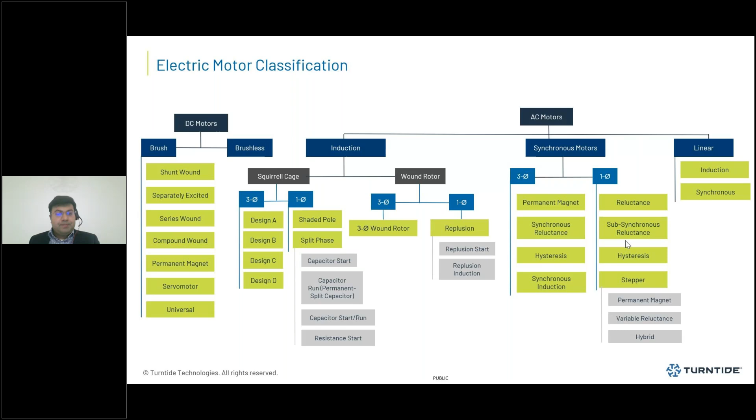So we're going to start off with the poll. Laurie, would you like to kick off the poll? Yes, let me launch this poll for you. So, you know what? I can't launch it because I can't find it in my list. So why don't you ask the question and we'll launch our next poll? Sure.

So just as a quick introduction to the axial flux motors, if you can guess when the axial flux motors were created, whether it was the 1700s, 1800s, or the 1900s. Keep your answer, and then we'll move on. Shall I move on, Laurie? Yes, please. Sorry about that.

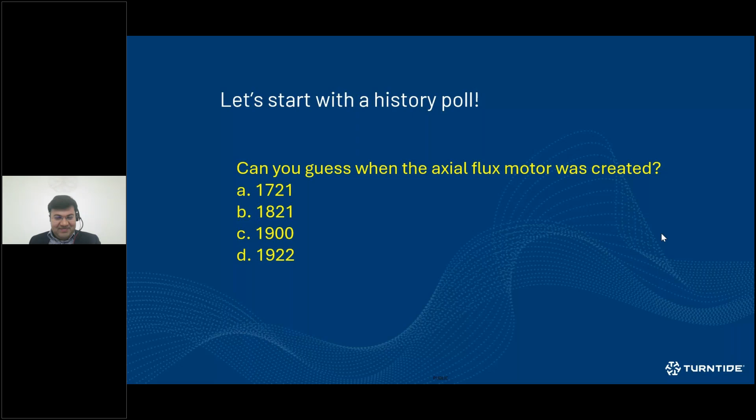No worries. So the first axial flux motor was, in fact, the first motor that Michael Faraday invented in 1821. It was of an axial flux topology. The radial flux motor, as the simple motor as that was called back then, was developed by Thomas Davenport in 1834. So here we've got a later model of the Faraday axial flux motor, which looks a lot more like the pancake motor arrangement that we're used to seeing today.

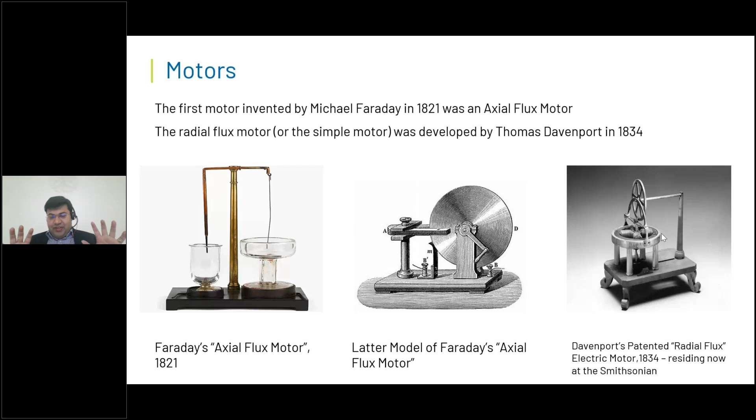So let's get into what differentiates an axial flux motor from a radial flux motor. It's based on the orientation of the magnetic flux. So if the magnetic flux is in direction radial to the axis of rotation, that's when you have a radial flux motor. Or if it's parallel to the axis of rotation, then you have the axial flux motor. And that is driven by the way and direction and topology of how the magnets are arranged. So if you can see on the diagram here, the axial flux motors have magnets arranged in such a way that the flux is parallel to the axis of rotation.

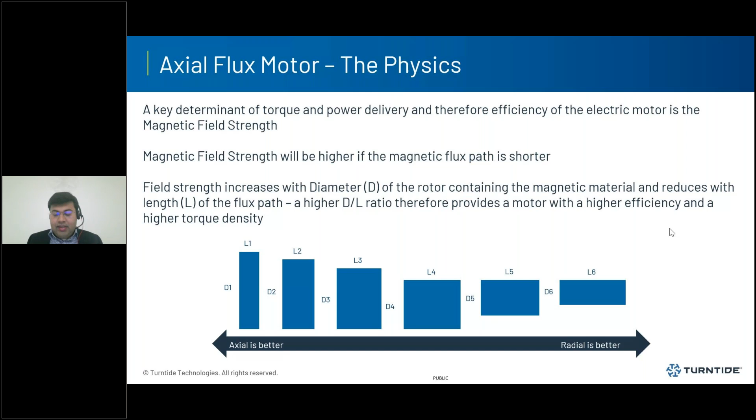So the ratio that we tend to work with in terms of determining that is the D/L ratio, diameter to length. With axial flux motors, you tend to have larger diameters and shorter axial lengths, so the magnetic flux has to travel a lot shorter path. The intensity of the flux is a lot higher in those instances. And so if you want much higher torque delivery, much higher power delivery, and therefore a lot greater efficiency as well, you tend to find that the D/L ratio is favoring the axial flux motors much more so than the radial flux motors.

Some equations: this is probably the only technical or semi-technical slide that you'll have on the presentation. With the radial flux motors, the torque tends to vary as the square of your diameter, whereas with the axial flux motor, the torque tends to vary as the cube of the diameter. Now, as you increase the size, the torque density stays the same with radial flux machines, but because of the cubic nature of diameter variance in terms of axial flux motor, as you're increasing the size, counterintuitively, your torque density also tends to increase with axial flux machines.

So people tend to think that bigger machines will be less torque dense. That's not quite the case with axial flux machines. Bigger machines tend to be even more torque dense than the smaller machines as far as axial flux topology goes. With radial flux machine, you tend to have fairly heavy weight and high inertia in terms of rotor, whereas with axial flux machine, on a torque to torque comparison basis, you'll have much lower inertia rotor that can deliver the same or higher amount of torque.

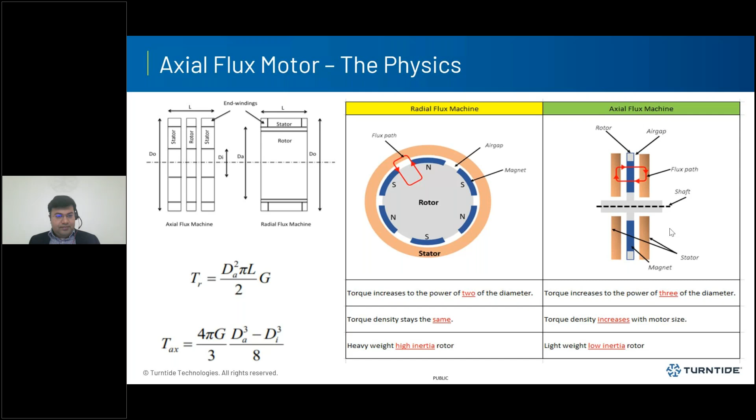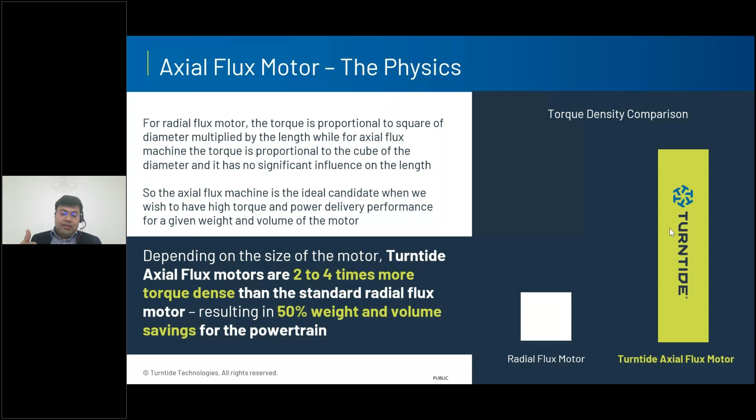So because of the cubic nature of torque variance with respect to axial flux motors, you tend to get 2 to 4 times more torque density compared to the standard radial flux motor. So if you convert that in terms of weight and volume savings, you'll have about 50% weight and volume savings for your powertrain. Now that is huge. If you're a vehicle designer, if you're a powertrain designer, almost halving your weight and space can lead to a lot of benefits, including more components in your powertrain, as well as making the whole system more efficient.

So, poll question, Laurie. Yes, we have another. We would like to know if you or your teams have implemented axial flux motors in any current vehicles or equipment, or actually are a user of one such equipment. We've launched the poll, and I feel like the answers may be similar to the last poll. Pretty much, yes. We'll give you about 20 or 30 seconds to answer, and then we will go ahead and end it and share the results.

And yes, 5% yes, 95% no, which is kind of what you probably thought. Very similar to the previous question. Yes, excellent. Okay, good to know.

Another poll question. For the 5% that did say yes, or the 95% that said no, if you haven't implemented an axial flux motor before, what was the main reason that led you to not implementing axial flux motors? Was it the availability of the product itself, or the price point, or the suitability to the application, or you simply were not aware of the existence of axial flux motors and looked into it? Yeah, we have launched this poll, and you can actually select more than one answer. So feel free to do that, and we'll give everybody about 15 more seconds to answer.

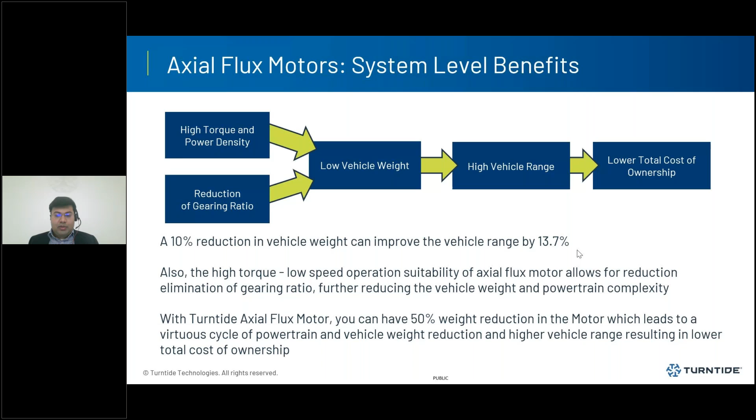Another key benefit that I want to talk about is the absence of cogging torque. Now, cogging torque is a phenomenon that occurs in permanent magnet motors where, if you ever moved the rotor by hand, you can feel the rotor moving in discrete steps rather than smoothly rotating fairly uniformly. And this is because the permanent magnets in the rotor and the stator teeth are interacting, and that is creating a pulsating torque. Now, if you want a fairly smooth operation, which granted most vehicle operations would require a smooth, non-jerky, and precise motion, then the cogging torque is a fairly big evil.

Now, in order to mitigate the cogging torque, you can use various techniques. You can skew your rotors in such a way that the cogging torque produced is less. You can also adjust your stator tooth shape to make sure that the cogging torque is reduced or minimized, or you can implement fairly sophisticated sensorless control algorithm techniques where at those instances the current is varied so that the torque is lowered when it cogs.

So one of the areas where we researched and improved our products is the NVH performance of the motors. If you have segmented teeth in your design of your stators, you tend to get a lot higher cogging torque, and that leads to poor NVH performance. So what we've done is we've designed it in such a way that there's no segmented armatures, there's no segmented teeth in the stators, and so there's little to no cogging torque, almost immeasurably low, and therefore a lot higher and better NVH performance.

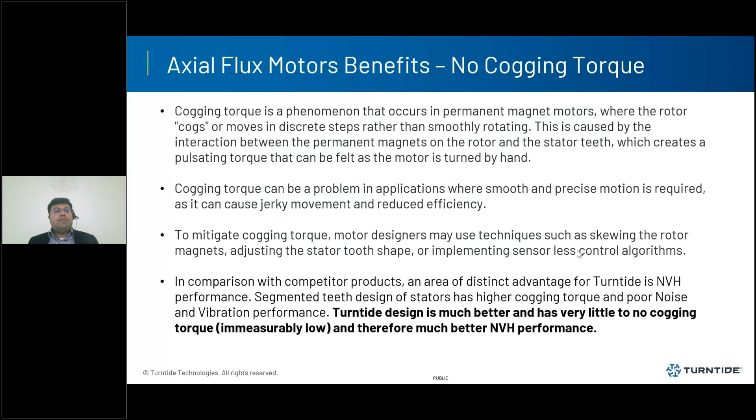Let's get into the types of axial flux machines. People thought that axial flux machines are only of a single type, but we can have multiple sub-varieties of that as well. And that can be done through the structure, i.e. the topology of the motor itself, what sort of cores you're using, what kind of slotting you're using, the type of winding distribution as well, and what sort of permanent magnets are being used.

So the type of axial flux motors that we've tended to focus on are the dual stator single rotor type or the Kaman type, using an iron core. And the other type of motor that's fairly popular is your single stator double rotor type or the Torus type.

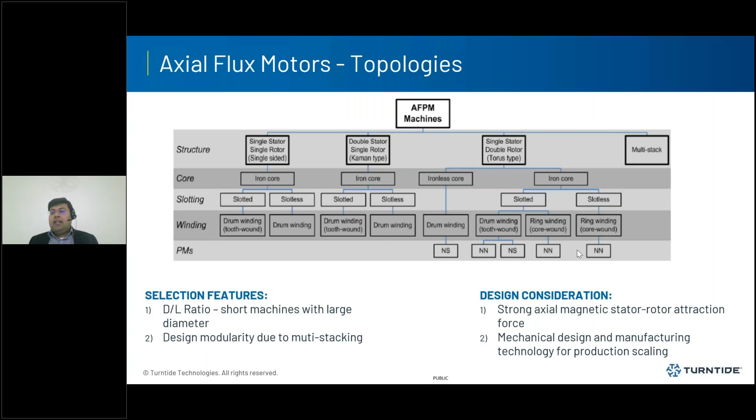Now, why did we go for the double stator single rotor feature? We wanted to maximize the D/L ratio and minimize the machine length as much as possible, and also provide design modularity where we can do multiple stacking. And the designs that we had available had the DSSR topology, the double stator single rotor topology, that lended itself really well to the multiple stacking options as well.

So just to diagrammatically illustrate that, the figure on the left here with the two stators and the single rotor is the Kaman type that we've gone for. It's without any steel discs. It's leading to a lot shorter machine length. And in terms of the cooling, you can have very effective winding cooling through indirect cooling jackets, as shown in the figure here.

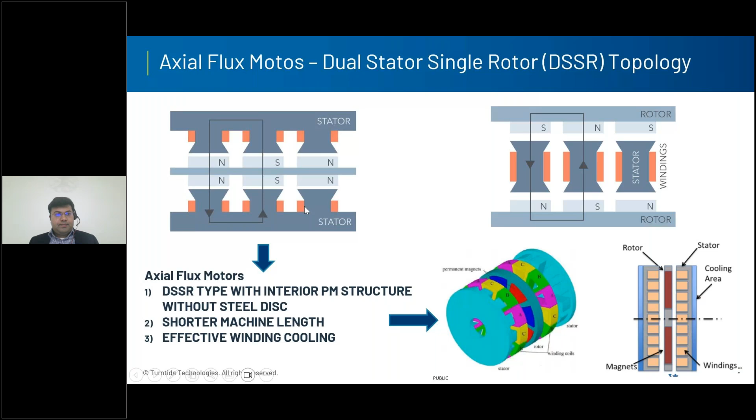In motor design, we've found the use of simulation to be fairly useful. We've simulated on all fronts, and that includes finite element analysis for structural integrity for vibration performance. We've done computational fluid dynamics as well to make sure that the coolant flow is optimized for the design and performance of the motor. And perhaps the most important simulation tends to be the electromagnetic simulation as well. So we've had in-house expertise where we used tools like Maxwell and others to make sure that the electromagnetic design and performance is optimized to its highest level.

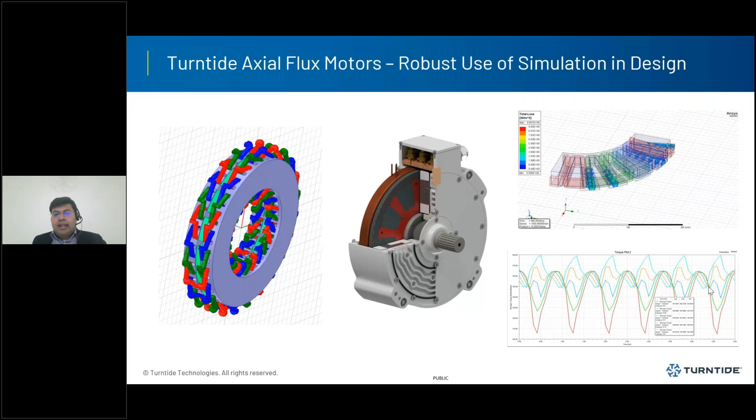So just an overall view on the DSSR topology and construction. At the top, we have the high voltage connector housing. This is typically rated to be up to a kilovolt. So high voltage applications up to about 860 volt can be covered while accounting for the ripple and the overshoots as well. We are constantly adapting and improving the connector housing designs for various orientations and for various types of phase cabling or busbar arrangements that are required for integration into end applications.

The heart of the motor, that's the composite rotor with embedded permanent magnets held into the spider cage structure. So if you can see the red spider cage structure, that's got the black permanent magnets embedded into them. And then they're banded together with a carbon fiber tape to make sure that it can hit the right velocities as required by the application while still holding the magnets in place.

We got the dual stator arrangement on either side of the rotor and cooling jackets. So this is a fairly conventional cooling circuit with a water ethylene glycol cooling mixture. The shape and the arrangement of the cooling fins, the cooling channels, is something that we are constantly researching and optimizing to give us the highest cooling efficiency with the lowest pressure drop as much as possible.

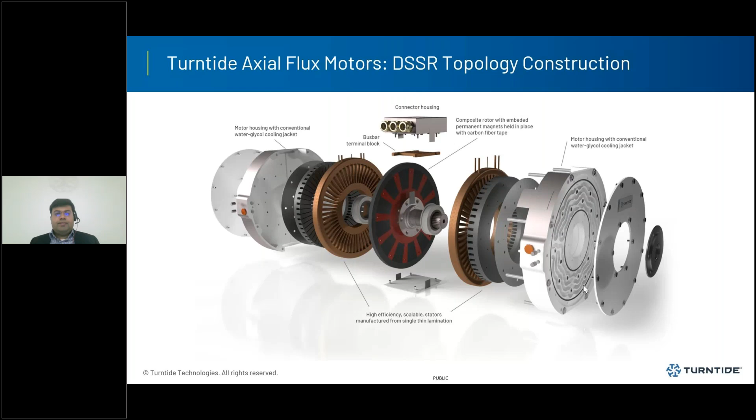So if I'm to summarize what the value proposition of the axial flux motors is, the first and the most clear benefit is the high torque and power delivery in a fairly thin design. So if you want a high performance application or your application has space constraints, or you can use the space for some other differentiating feature for your vehicle, then axial flux motor tends to be your motor of choice. As I mentioned with the topology before, this is a design that can be stacked. So you can have multiple stacks of these motors to give you a wide range of torque and power, and we'll cover the numbers in a few slides' time.

Efficiency as well, owing to the thermal design, the electromagnetic design, and the mechanical design improvements that we have done, we are able to hit the highest efficiency classes. We are easily at the IE4 efficiency class mark, and we are trying to hit IE5 and beyond with the new research that we're doing as well.

Cooling tends to be often ignored, but the fact that these motors are cooled using commonly used water ethylene glycol mixture makes it very popular and makes it easily integratable with other cooling circuits as well that can be used for inverters or power electronics.

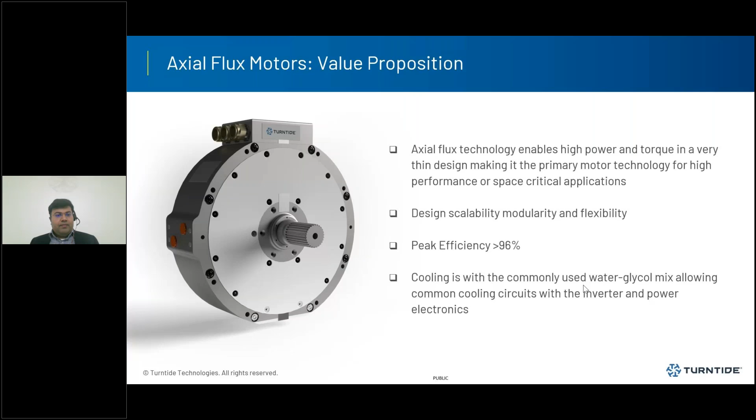So if you were to use axial flux motors for your future projects, given that there's a large audience that hasn't had the chance to use it, what would your top reason for doing that be? Would it be the power density and the torque density that this offers, the efficiency performance, if you'd like to stay ahead of the competition in terms of differentiating factor, if you're fairly space constrained, or some other reason?

So, Laurie, can we launch the poll? We have launched it, and we will give you guys and gals a few seconds to answer. Right now, it looks like high torque and space constraint is winning out. No one wants to stay ahead of the competition right now. No. No one. But we did say the main reason. That may be a sub reason. So we'll give you about 10 more seconds for those who have not answered, and then we will share the results with you.

All right, we are going to end and share. So maximum power density was 32%. Sorry, 23%. I read that backwards. The number one was high torque requirement in a space constrained environment, 62%. Maximum performance was 15%, and then staying ahead of the competition and other were 0%. So the three main ones were the three main ones.

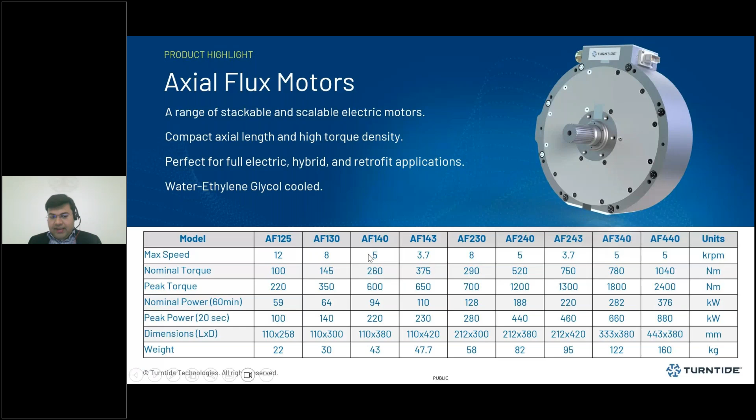That will bring it almost at parity or a slight premium with radial flux motors, and that's what we tend to do with the projects that we are working on right now. We're also considering using semi-automated or fully automated machine winding so that it can allow you to ramp up from tens of thousands to hundreds of thousands of motors in terms of annual production as well.

Most of these motors tend to be limited by their thermal performance. So optimizing the thermal part, the cooling channel, is a key differentiator and can give you lots of benefit by allowing you to push the motors to work at even higher temperatures and lower flow rates. So a key research area for our thermofluids guys has been to optimize the design of the cooling channel by reducing the metallic length of the cooling channels as well, and by reducing the pressure drop that's experienced by the fluid that's flowing through the cooling channels.

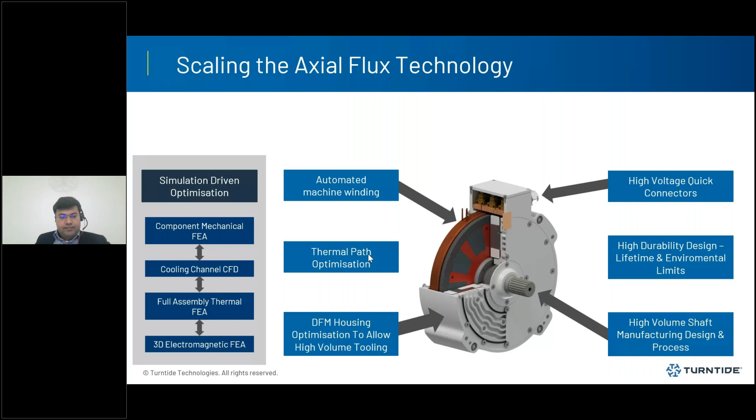Some of the applications where we've implemented these optimizations and performance benefits: as I said earlier, for premium automotive, it's used mainly for traction purposes for high performance e-motorbikes and automotive cars as well. There's a wide variety of applications in the commercial trucks and bus space, traction being the most common one, but we've had a lot of inquiries for electric power takeoff as well. For larger trucks and buses, they can also be used for ancillary applications. So if you've got a huge, big 60-ton truck, then you'll need a fairly big cooling fan for cooling the battery electric vehicle circuit or the hybrid circuit as well.

And the smaller diameter class of motors that we have, the 125 and the 130, are fairly popular for use for those ancillary applications as well. If you're also in the hydrogen game, I don't know how many hydrogen people have joined today, but we've got a solution for the hydrogen guys as well, because the smaller diameter, higher speed motors are also suitable for use as fuel cell superchargers.

On the off-highway machinery, similar domain with a lot of variety of applications. You've got construction and mining equipment. You've got excavators, wheel loaders, and that's where you can use for traction, both track and others, and ancillary functions for slew and swing. Another interesting application for us was street sweepers. Now, they have so many implements and are so space constrained that the axial flux motor becomes very applicable for street sweepers as well. So we've used these for traction as well as for sweeping implements on the street sweepers.

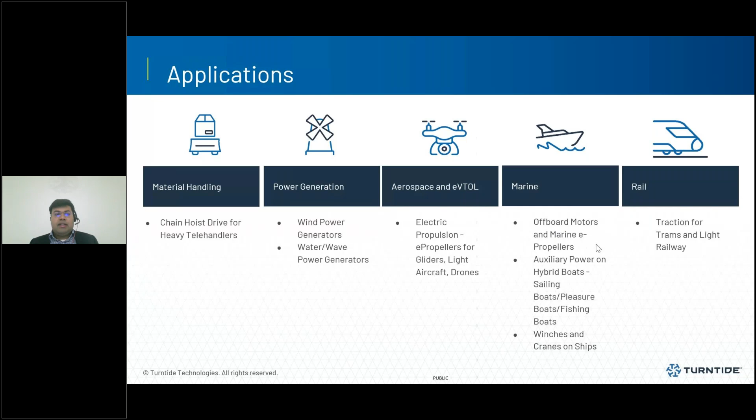So, I'd like to conclude here by saying that the axial flux motors, they're inherently superior technology because they're able to offer you a lot higher performance that can allow you to have much smaller, lighter, higher efficiency, and more powerful vehicles at the end of the day. And we are leading the way in terms of our core technology research and manufacturing methods to enable multiple markets to reap the benefits of these and make axial flux motors as popular as possible and for use in mass applications as much as possible.

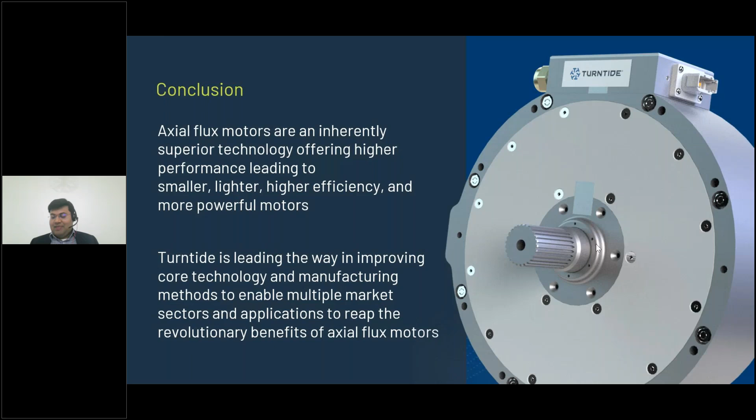And the first one we have is, if axial flux motors have been around for hundreds of years, why are radial flux far more popular, and what stops axial flux from being successful?

Great question. So they have been around for hundreds of years, but the type of technology that has had the most productionization investment in it is the radial flux technology. If your application is not length constrained in any way, then you tend to go for a radial flux topology as an easy fix. And because it's had the most amount of investment in terms of productionization, typically 200 years, they are at a price point where they're readily available and cheap.

What we're trying to do is take the axial flux motors through a similar journey. They've simply not had the attention or investment as radial flux motors have had. So since it's an inherently better technology, if we get it to the same point in terms of its productionization investment journey, then our thesis is that it will take off in an even bigger way and capture a lot of the radial flux motor market as well.